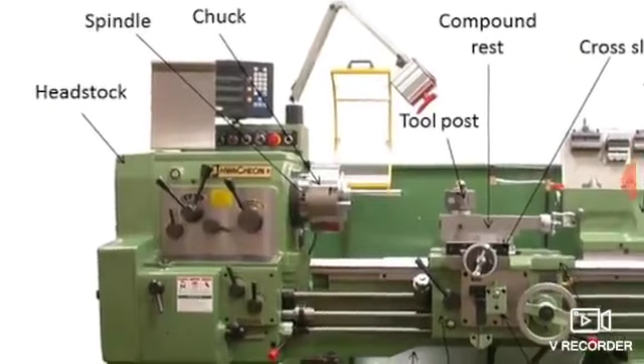Here you can see the image of lathe machine. This portion is known as the headstock. The headstock carries a gear train because you want to rotate the workpiece at different RPM.

Why is it important to rotate the workpiece at different RPM? Because the RPM of the workpiece depends on the tool material as well as workpiece material. If it is a ductile material, you will rotate the workpiece at very high speed, and if it is a hard material, you have to process it at low RPM. That means there is a requirement of different speeds, and that speed reduction or enhancement is done inside the headstock. Then after the headstock there is a spindle on which the chuck is mounted.

The spindle is a rotary member, and on the spindle there is a chuck. The chuck is basically used for clamping or holding the workpiece. There are different types of chuck, like 3-jaw chuck, 4-jaw chuck, depending on the number of jaws, and there is also a type called magnetic chuck. Depending on its function or the number of jaws, there are various types of chuck, and the chuck is basically used for holding the workpiece.

After that there is a tool post for keeping your cutting tools. Here you can use a single point cutting tool, mostly on CNC lathe machine. On lathe machine a single point cutting tool is used, and you can keep either 4 or more single point cutting tools over the tool post.

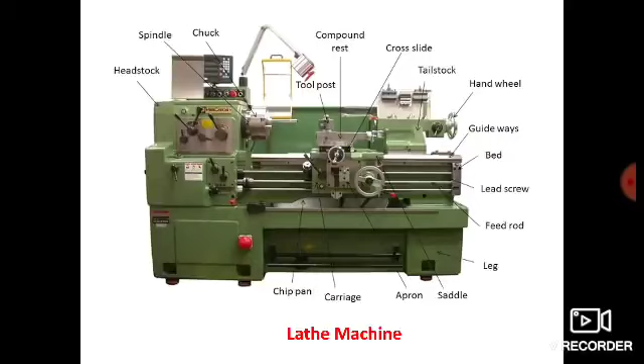Now we will see the operations that are possible on the lathe machine. The very first operation is facing. It is the first operation done on the workpiece. It is a machining operation done to produce flat surfaces at the end of the workpiece. This operation is performed by feeding the tool perpendicular to the axis of rotation of the chuck.

Here you can see the workpiece is clamped in the chuck and it is rotating, and this is the tool, and this arrow represents the direction of feed. Facing is nothing but the first operation that we perform on the workpiece, and it is done to produce a flat surface at the end of the workpiece. Suppose the end of the workpiece is irregular, in that case we perform the facing operation to produce a flat surface at the end.

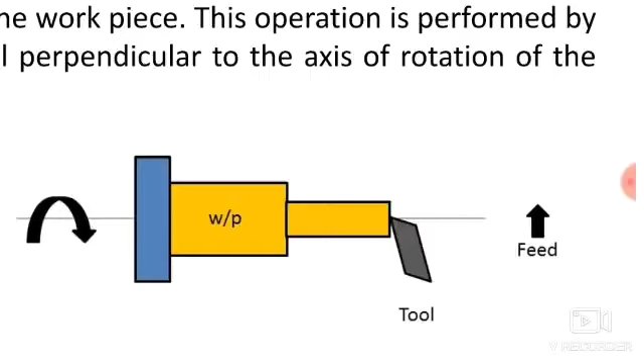Here the tool is fed perpendicular to the axis of the lathe. That is very important. This operation is performed by feeding the tool perpendicular to the axis of rotation of the chuck. So this is the first operation, that is facing.

Next operation is known as turning. In the turning operation, the excess material is removed from the surface of the workpiece to produce a cylindrical surface of desired shape and size.

During the turning operation, the tool is moved along the axis of rotation of the chuck, and it reduces the diameter of the cylindrical workpiece. Turning is the second operation we can perform on the lathe machine. In turning operation, we remove material over the surface, and by removing material we are reducing the diameter of the workpiece.

Here the workpiece is shown in yellow color and it has two different diameters. This operation is known as step turning operation, since a single job has two different diameters. In turning operation, the material is removed over the surface and the tool moves along the axis of the lathe machine or spindle. In facing operation, the tool moves perpendicular to the axis of the spindle, whereas in turning operation, the tool moves along the axis of the spindle.

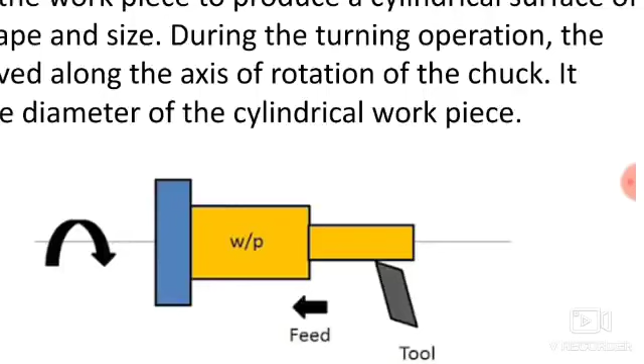Next operation, that is boring. The process of removing material from the hole of the workpiece is called boring. Holes are bored with the help of a single point cutting tool. Here you can see the boring operation, which is nothing but enlarging a previously drilled hole.

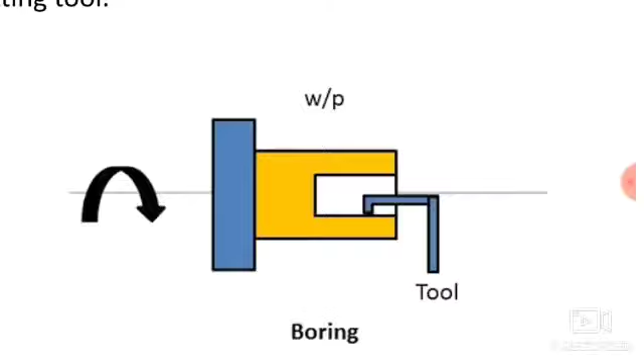So at the end you can increase the diameter of that hole, and that is nothing but the boring operation.

Next operation, drilling. It is a process of making a hole in the workpiece by the use of a drill. The drill is held in the tailstock and the drilling operation is done by advancing the drill into the workpiece by rotating the handle of the tailstock.

You can perform the drilling operation over the lathe machine also. For that you have to clamp or fix the drill bit in the tailstock, and then the tailstock is advanced towards the workpiece by rotating the handle provided on the tailstock, and with that you can perform the drilling operation.

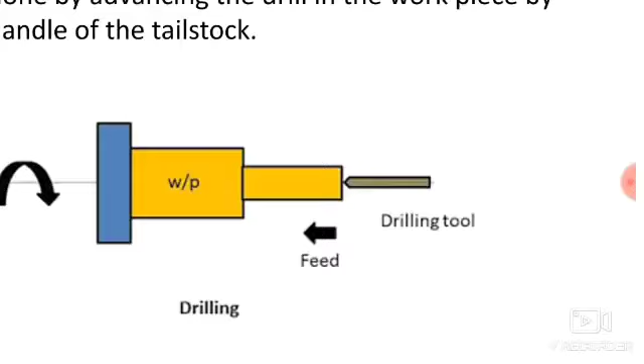So drilling is nothing but the operation of making holes over the workpiece. You can perform this operation on your lathe machine with the help of the tailstock by rotating its handle. Here the drill bit moves along the axis of the spindle.

Next operation, that is knurling. It is a process of making indentations on the border of the workpiece. The knurling operation is done to provide a better grip on the job. It is performed by a knurling tool, which is pressed against the job to perform the knurling operation.

Here in this image you can see the knurling operation, done with the help of a knurling tool. The knurling tool is pressed over the surface of the workpiece to produce a pattern, and that pattern is useful for proper grip. Whatever pattern is present over the knurling tool is transferred to the workpiece, so the same pattern is obtained on the surface. This is known as knurling operation, done for the proper grip of the workpiece.

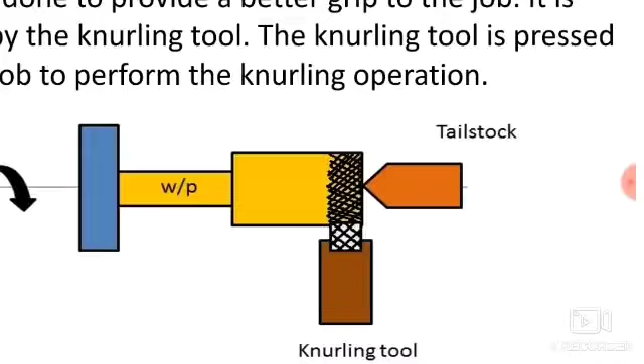Next operation, that is chamfering. Chamfering is the process of beveling the extreme end of the workpiece. It is done in order to remove the burr, to protect the end of the workpiece from being damaged, and to have a better look.

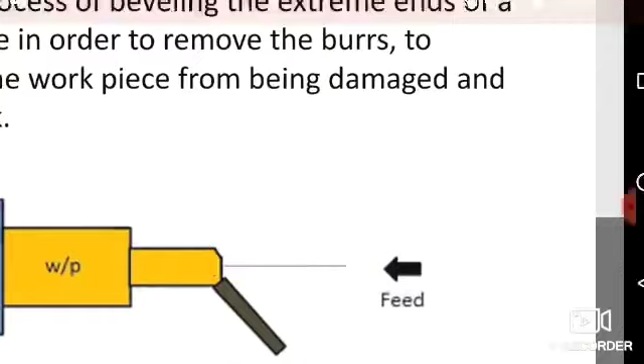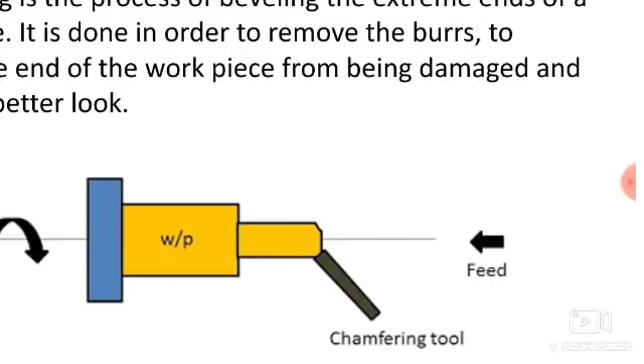Here you can see a chamfering tool is used to remove material over the edges. Sharp edges may cause damage while handling, so the workpiece should not have any sharp edges, and these can be removed during the chamfering operation, as shown in this diagram.

The next operation is parting off. It is a process of cutting a workpiece after it has been machined to the required shape and size. Parting off is nothing but a process of cutting the workpiece into pieces.

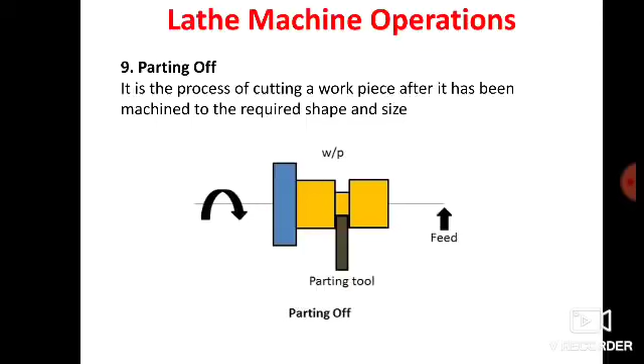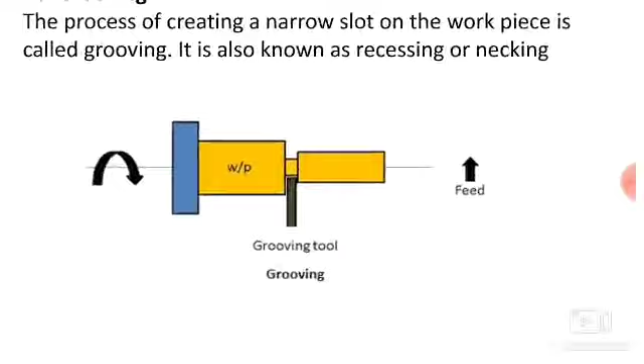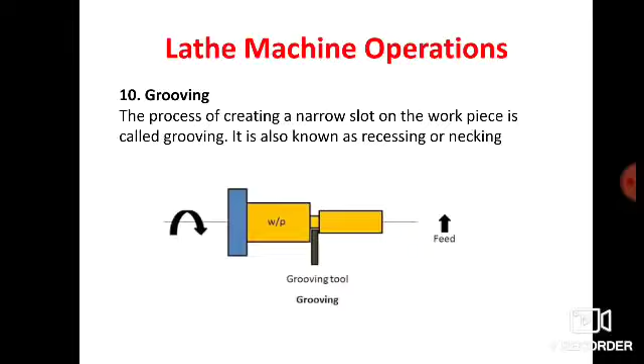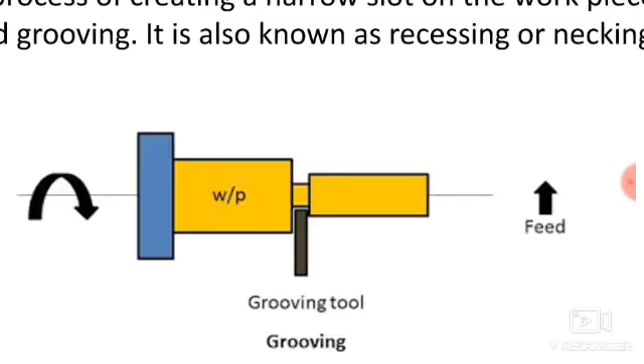Next operation is grooving. The process of creating a narrow slot on the workpiece is called grooving. Here we create a narrow slot with the help of a grooving tool, and this process is known as the grooving operation. It is also known as recessing or necking. Here you can see a neck has been formed - you don't need to completely break it, just create a narrow slot. Here you can place O-rings or gaskets. For this purpose, the grooving operation is done, where the grooving tool is fed perpendicular to the axis of the lathe machine.

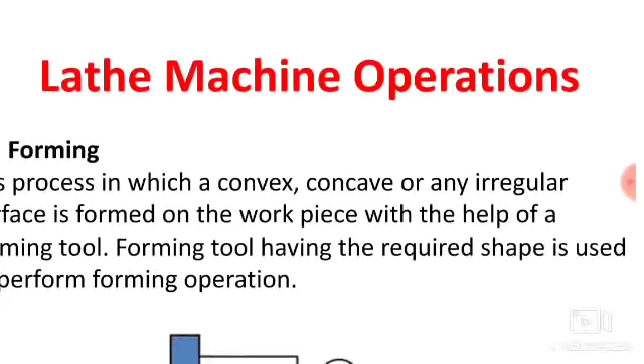Next operation is forming. It is the process in which a convex, concave, or any irregular surface is formed on the workpiece with the help of a forming tool. A forming tool having the required shape is used to perform this operation. Here you can see the workpiece clamped in the chuck, and this is an example of a forming tool which has the same shape that is required.

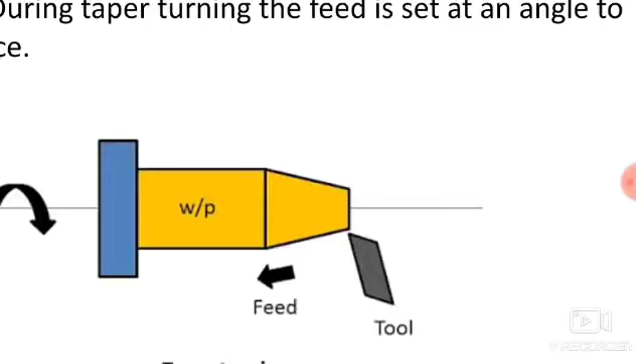The next operation is taper turning. It is a process in which a conical shape is produced on the workpiece. During taper turning, the feed is set at an angle to the workpiece. Here you can see this tool is given a particular angle, and it has to travel along that angle. The tool is moving simultaneously parallel to the axis as well as perpendicular to it - moving along two axes simultaneously. This is known as the taper turning operation.

The last operation is threading, which you can perform on the lathe machine. The process of making threads on a cylindrical job is called threading. Here you can see the process of threading. A threading tool or single point cutting tool is used to produce the thread over a cylindrical object, and the tool travels along - first the feed is given, and after that the tool moves along the axis of the lathe, and the thread is produced over the surface of the cylinder.

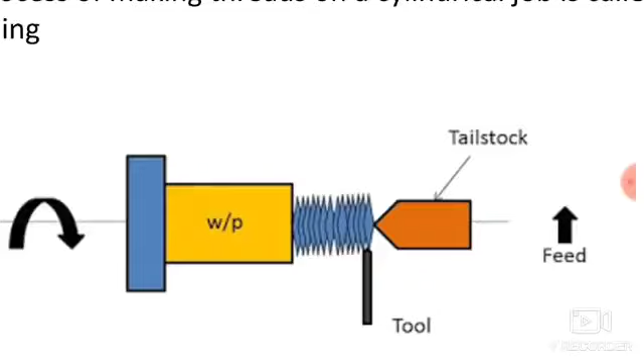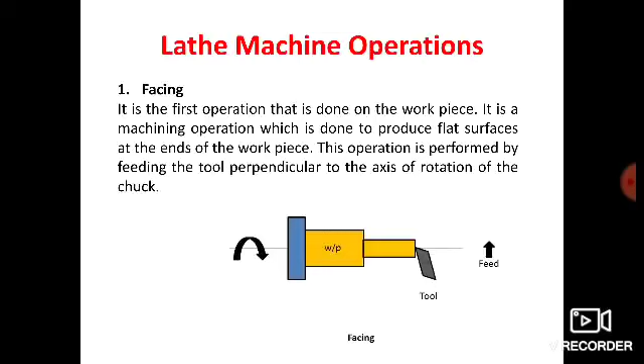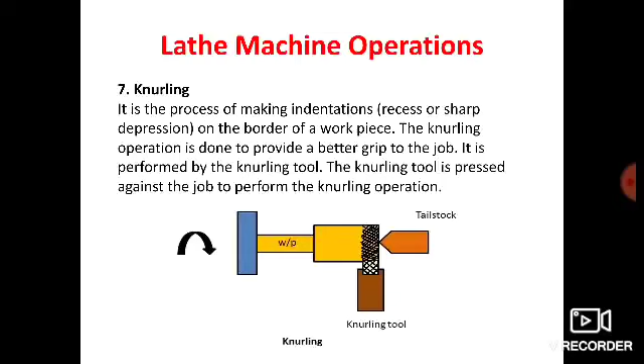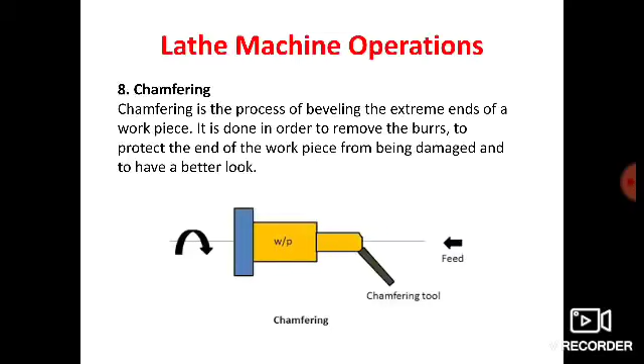So these are the various operations we can perform on a lathe machine. Let's summarize: the first operation is facing, used to produce a flat surface over the end. Then turning, to remove material over the surface of the workpiece to reduce its diameter. Next, boring, a method of enlarging the diameter of a previously drilled hole. Then drilling, a method of producing holes inside the object. After that, knurling - a special knurling tool generates a pattern over the workpiece for a proper grip. Then chamfering, to remove the sharp edges of the workpiece using a chamfering tool. Then parting off, to break the workpiece into two pieces using a parting off tool.

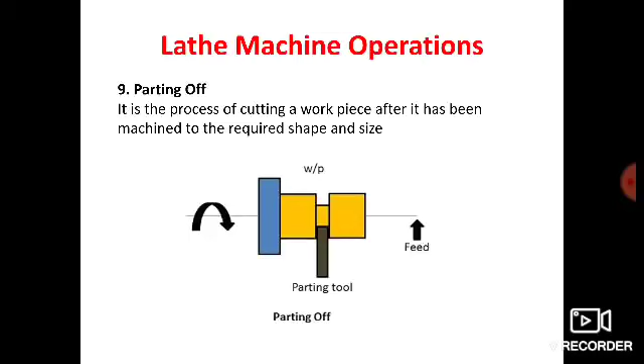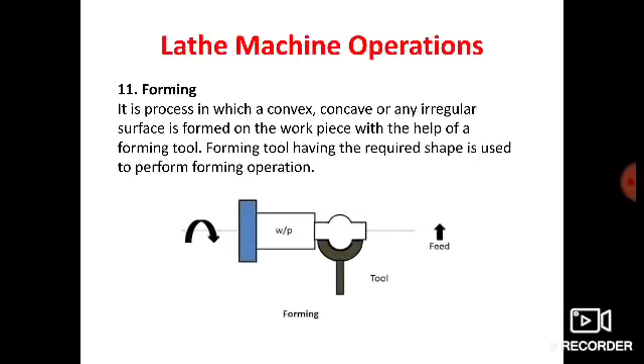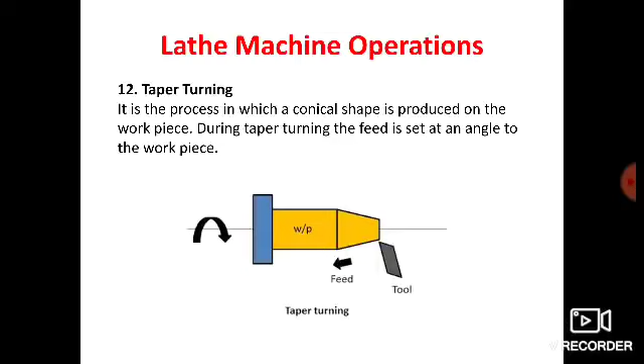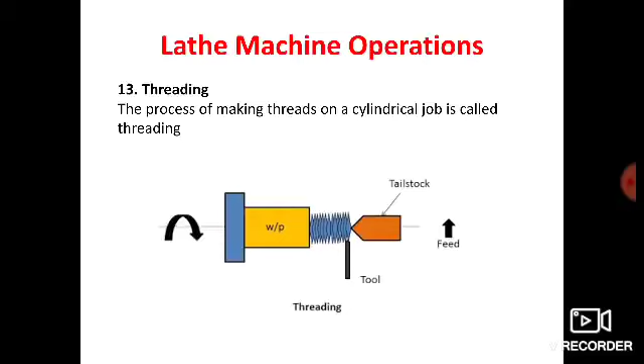Then grooving, where we produce a narrow neck over the surface of the workpiece using a grooving tool. Then forming, to get any kind of shape over the workpiece using a forming tool, which will have the same shape that is desired. Then taper turning, where we reduce the diameter and produce a conical shape with the help of taper turning operation. And the last one is threading - we generate the thread over the cylindrical workpiece with the help of either a threading tool or single point cutting tool. So these are the operations that we can perform on a lathe machine. Thank you so much for watching my video.